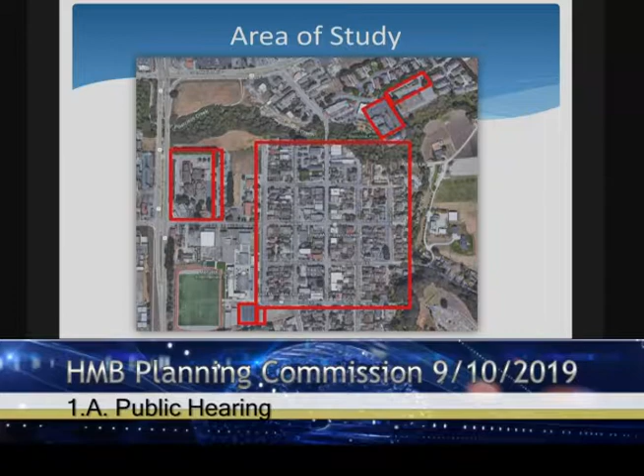So the area that we designated as downtown in Half Moon Bay is bordered by the Main Street Bridge to the north and extends all the way down to Correas Street to the south. We want to include a few prominent parking lots for the city, so we included the Cunha School parking lot, the library parking lot, the Shoreline Shopping Center parking lot, as well as the community center, the Stone Pine lot, and post office. We think this encompasses the main body of downtown and the main amount of parking available to those trying to access downtown.

This is a simple map showing the time limit for street parking within the downtown area. On Main Street and all of the adjacent blocks, parking is limited to 2 hours. On Purissima and Johnston Street, it's 12 hours. Beyond that, it's mostly unrestricted, with the exception of around the library and in front of the school, where it's limited to 30 minutes or less.

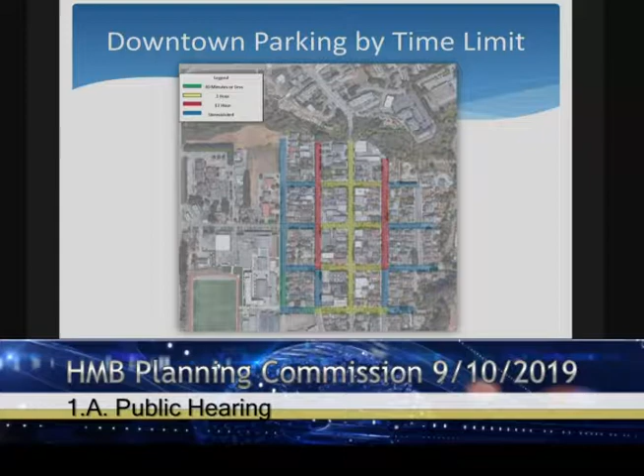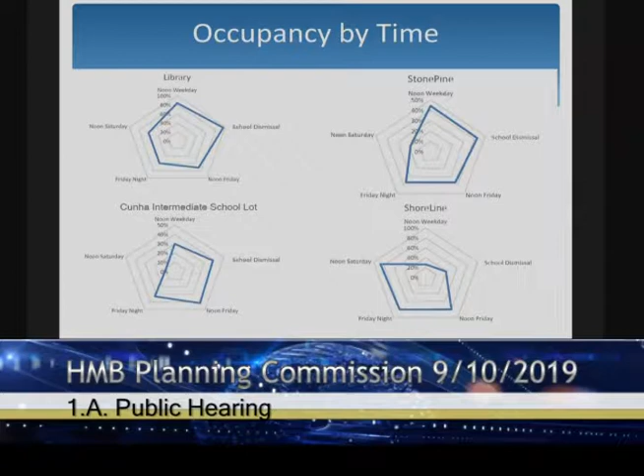These radar charts illustrate the parking availability at various times for each of the parking lots we decided to survey. You can see that the library, the Stone Pine parking lot, and the school's parking lot had higher occupancy levels throughout the week, whereas Shoreline, along with the community center, saw a much higher concentration during the weekend. It should also be noted that when we were collecting data for Saturday at noon, the farmers market was occurring in the Shoreline parking lot, which accounts for the large spike in parking occupancy at that time.

This is a map we created to show parking occupancy broken down by each block within the downtown area. Red signifies 85 to 100% full, orange is 70 to 84%, yellow is 50 to 69%, and green is below 50%. You can see there's a concentration in parking occupancy along Main Street and Mill Street, which makes sense as people are coming off of 92 and down Main Street immediately looking for parking. They either park along Main or turn down Mill Street.

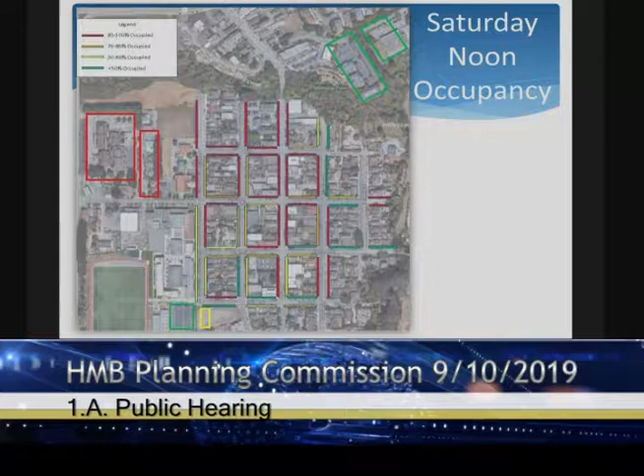Though despite this, there are still blocks with less than 50% occupancy, and within any location downtown, within 2 blocks, there's a street that is no more than 70% occupied.

From these findings, we can conclude that parking, as expected, is consistently highest along Main Street and the adjacent blocks, like Mill Street, since the main flow of traffic is coming off of 92 and straight down to Main Street.

We plan on extending this survey to include more times, including special events at Carter Park, for example, the Summer's End Festival on September 21st. We'd like to see how that affects parking, especially with the Stone Pine parking lot being as close as it is. We plan on this being an ongoing study, but this is the data we've collected so far. So thank you.

And now I'm opening up to questions.

I wanted to add a couple more notes for the audience, since these topics are addressed in the written report. The inventory of EV charging parking spaces as well as accessible parking spaces are accounted for in the study, but we don't know the occupancy rates of those, and that's something we want to be tracking over time. We know that for Carter Park, we're especially doing work on making sure there's accessible parking for that improvement.

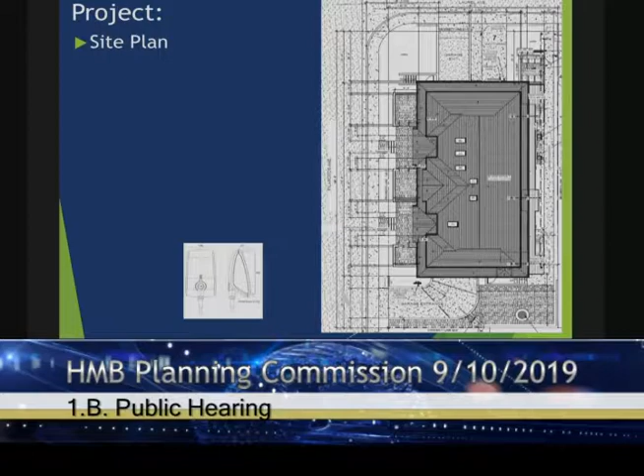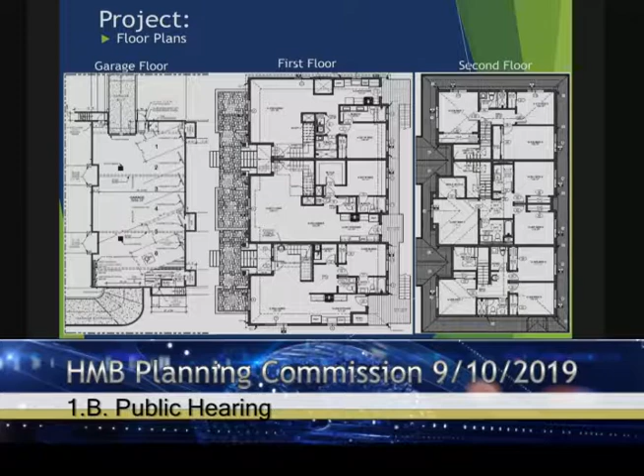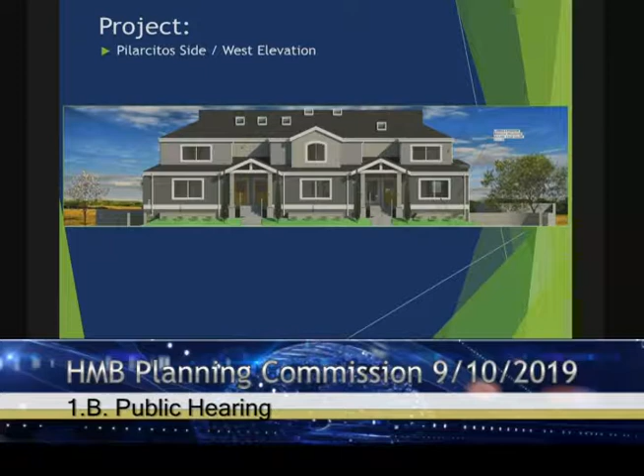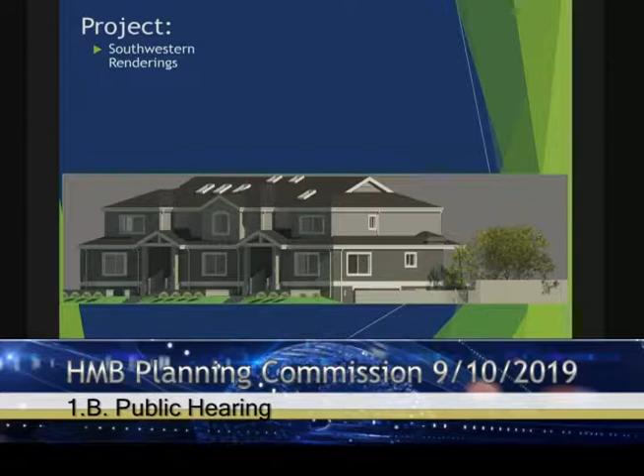And then a few things for the commission to consider: the local coastal program, the land use plan, zoning, and CEQA.

For one, the project has been designed to conform to the development standards that are applicable to the R3 zoning district.

Yes, the project site is within a visual resource area, and we have included the findings within the resolution, similar to projects that the commission has recently reviewed to the south along Cabrillo Highway.

Since the property originally included several separate parcels, a condition of approval has been included to require a lot merger before a building permit is issued.

You will also find that there was a second memorandum distributed to the Planning Commission that includes some revised language for the zoning conformance finding.

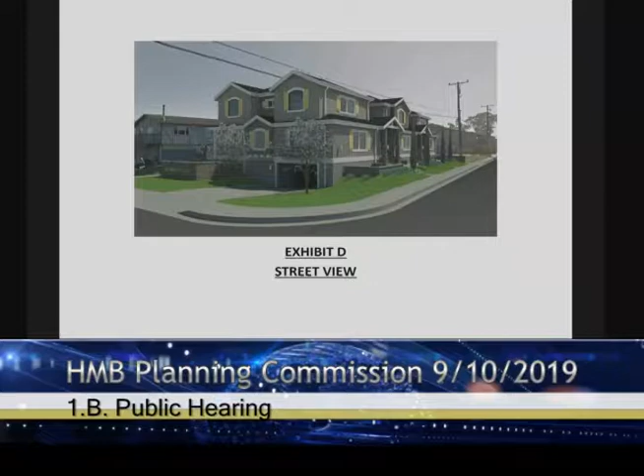You can go back to A4 if you want, we can look at those. But the front porches promote interaction to Pilarcitos Avenue. I was out in front there, and I actually ran across a neighbor, and we sat there for several minutes talking. So we designed those front porches not to just be at the first street level—we brought them down a little bit more to the street.

As I was looking around the neighborhood, there were kids playing in the street, in front yards, families out in their front yards in chairs, and I thought that was a cool vibe to stick with. So we, with Ken, designed these porches that will interact with the community there and draw people out into those forums.

We also, in the back there, created a place where neighbors could congregate and barbecue. So in that back corner is a good spot for that, and hopefully the landscape artist could come and talk a little bit about that. It's a super unique place there.

And originally when we went there to build, we were just building for rental income. And as we got drawn into the community there, and Scott showed us some of the things we could do, I think we came up with a great project that will add to the quality of life there.

In closing, we hope the Planning Commission recognizes our project is designed to make a difference in a small way for a bigger need. Our project maximizes density by adding much needed housing, addresses local needs to maximize on and off street parking, and creates amazing spaces for unique interaction and experiences.

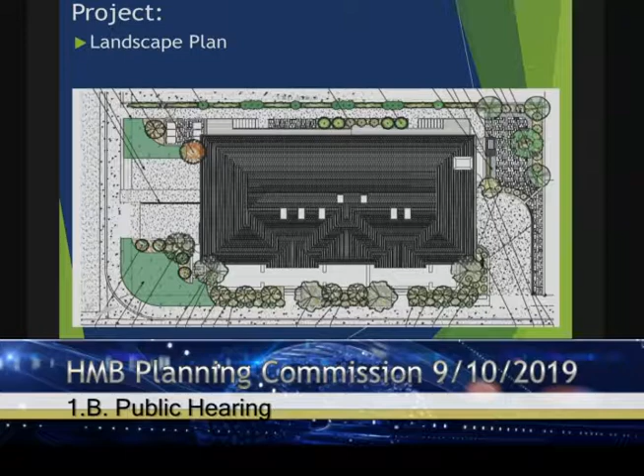I did have one thing that wasn't clear. I didn't care for the metal grate or whatever that was outside of the little patio door. Scott, you mentioned at the beginning that they had proposed to remove it, but it also looked like they just removed the entire little balcony. I was wondering, is that intentional? So there wouldn't be any replacement, not even with a window? I probably should have asked this earlier, but I just realized it looked like a complete removal, which may be fine because then there's noise reduction as well.

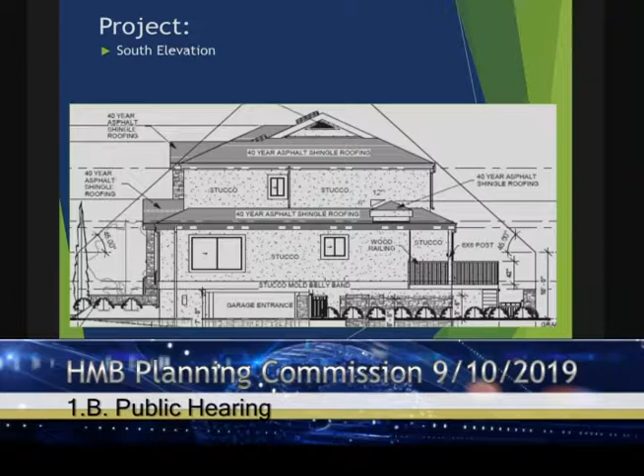Yeah, when we looked at that with Scott, originally when we did the project, it fit right in, and it just kind of got left there, stuck to the side of the house. So Scott brought it up, we took it off, and then as we looked at the floor plan, we realized there's not much room in the living room for TV space and all that stuff.

So on that side, we removed it completely. On the other side, because it's south-facing, we thought we could get more sun out of that corner, so we put a window there instead and got rid of those balconies. Those balconies are design-wise problematic anyway, water and things like that, so we just omitted it.

And I'm totally supportive of that. I just wanted to make sure I was understanding correctly. I agree, I don't think the balcony was adding much, especially on that north side.

And the other thing, I really appreciate that the sidewalks are going to be widened. I think having that better access along there is something I appreciate about the project, and that it's included. So I think that's really important.

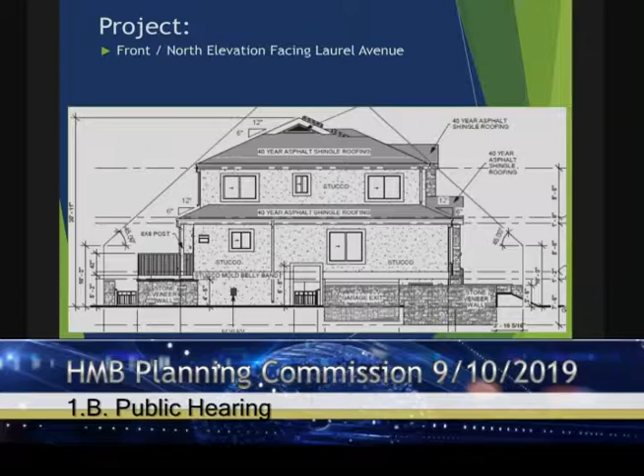I have friends who live in that neighborhood, and I've spent enough time there to realize it's not like trees everywhere. In fact, I don't know of any of the streets right around there that have street trees, and so I agree with staff's recommendation on that.

I'm fully supportive. Also, I'm pretty sure that across the street along Laurel, from the proposed project, that complex has below ground parking. Yeah, actually it does, there's several below ground parking. Matter of fact, the civil engineer is here today.

I hadn't been aware of problems with flooding, but maybe it would be good to find out if that is an issue and whether that's been dealt with.

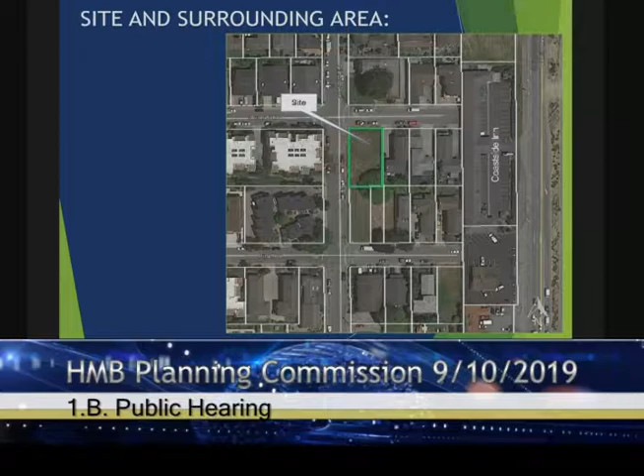So I spoke to the Pastorinos. They're the first ones that actually did this on Kelly, the underground parking in their buildings, and they haven't had a problem. Keaton Arahan recently built one on Pine, and he's about as low as we are, I kind of copied him a little bit. He's had no problems, and they're enjoying the space quite well.

But again, we have the civil engineer who could probably speak to this better than I could, if you wanted to ask her. Do you need additional information? I guess only if it's been an issue, and then how the proposed project would deal with that. That's the only question.

Hi, Carla Castro, Lea & Braze Engineering. Flooding has not been an issue, so I'm wondering if the concern is coming more from having street water from the gutter come in. Is that where the concern is coming from for potential flooding?

During the rainy season, several intersections in the area puddle and pool water. I'm not sure if it's right on this property, but I know we've had a number of issues reported, and I would ask city staff to look at some of the drainage things in the area. I know a little further down near Pilarcitos Creek, you do see drainage issues, so I just want to make sure there aren't any issues here.

I know that there is underground parking, I'm looking at a photo of it on Google Street View, and I've parked in some of those units in the past. So I just want to make sure we've learned from the projects nearby.

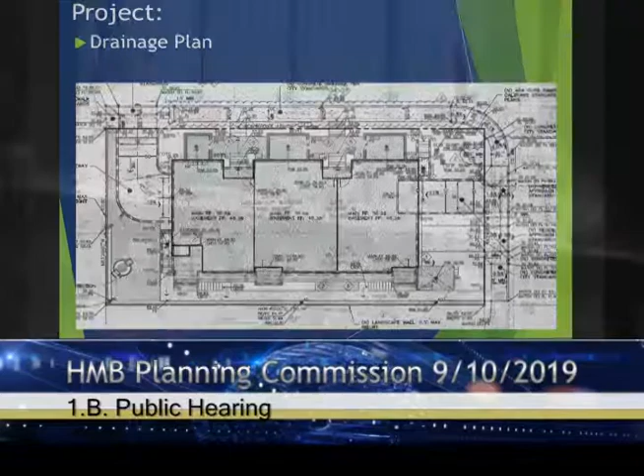Yes, that was the design criteria, which was, I think, a 10-year storm. Yes. Do we have a sense of the freeboard? We're living in climate change, with increasingly bursty weather patterns. Do we have a sense of the freeboard based on the experience of the neighboring development? Are they close, do they feel like they're a long way from flooding, or missing by the skin of their teeth, or do we have no data? Or do you have projections for this one?

For the flooding of the actual street or the actual site? The site. Well, being your storm system, the design system, being able to handle the storm with some freeboard, I'm just trying to understand what that is. So if our storm patterns increase, we know that.

Perfect. No, I think I actually have, so in terms of freeboard, we mainly provided as, I'm sorry, don't mind me looking through these pages really quickly. No, not at all.

We actually call it out as a percent over what we actually require. So again, we work with the engineer. We do have to accommodate a minimum 10-year, 2-hour storm duration, which we have complied with. With regards to that, we do have, I believe, and this is part of the report that goes to engineering, so I don't think—